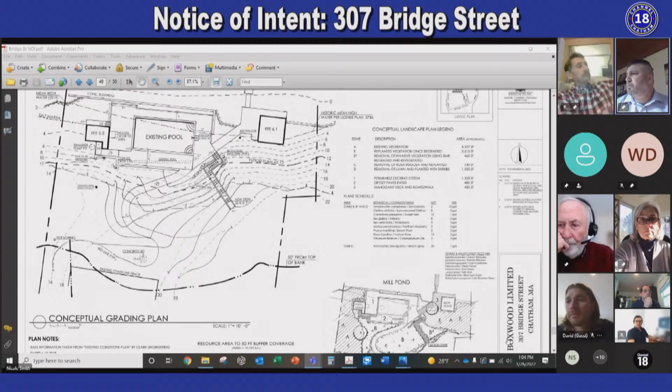I can do you want your plan first, or—I have a slideshow kind of to go through that will make it easy and concise, if that helps. Easy and concise is what we're all about here. Great. All right, let me share my screen.

You just make sure you're seeing the screen. Yep, it's there. All right.

As the application stated, we are proposing repairs and accessibility improvements to the existing boathouse, pier, and pool area at 307 Bridge Street. Blue Claw Associates and Coastal Engineering have prepared these plans.

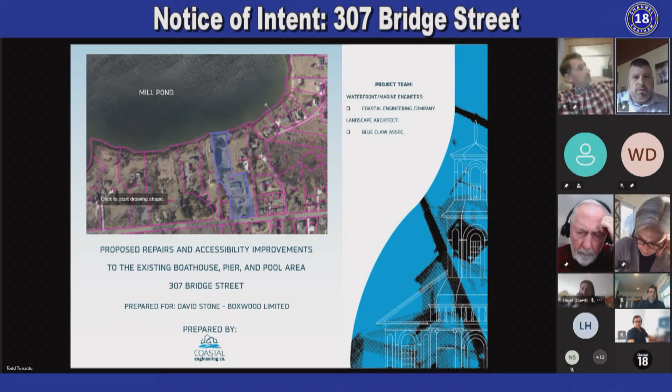Just to give a little history, it is a unique site in that it has an existing pool directly on the coastal bank and up against the bulkhead. The existing boathouse, bulkhead, deck, and timber pier and pool house structure were licensed in 1955, according to the Mass DEP Chapter 91 license.

The pool is believed to have been installed sometime in the 50s. However, the earliest plan recorded showing the pool that we could find was in 1976, recorded with the Town of Chatham planning. Additionally, the existing bulkhead just seaward of the pool was reportedly repaired in the 90s with an order of conditions issued in 1994.

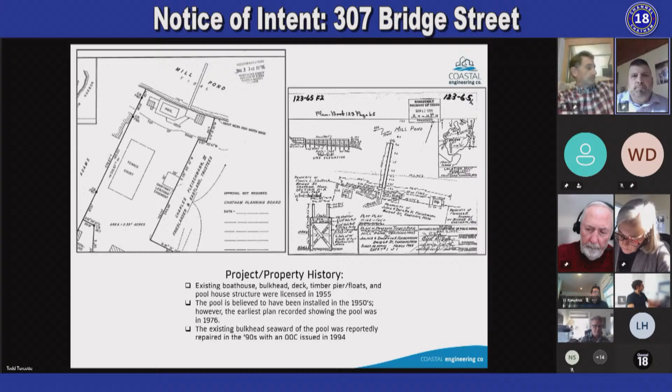The project includes repairs to the existing boathouse and deck foundation, some minor repairs to the boathouse, replacement of the existing timber bulkhead directly behind the boathouse, improved accessibility to the boathouse, pier, and pool with a handicap accessible path and reconstructed stairs, and repair to the existing pool deck area with improved handicap accessibility around the pool.

Also invasive species mitigation in the landscape area - I'll let JT speak to that later on - and reconstruction of the existing landscape retaining wall for accessibility improvements. One other item is removing and replacing in kind the existing pump to the septic system from the pool house.

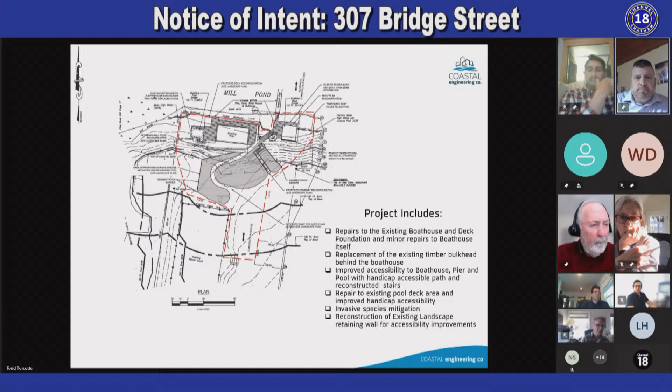The boathouse foundation and deck foundation currently consist of 30 existing piles. We are proposing to replace those with 21 new piles, reducing the impact, as presented in the alternatives in the narrative. The boathouse will basically be lifted off and temporarily supported on a pile structure, then put back and installed on the new pile foundation.

Next, the existing deck around the pool will be reconstructed to keep it all at one level and provide easier access into the pool and around the pool for handicap accessibility.

Then we are replacing and improving the stairs. The access stairs currently do not have a rise and run that meets code requirements and are a little awkward, so we're improving those.

The existing path is not handicap accessible - it's 55 feet long with a rather steep slope. Our proposed path is about 90 feet long, at about a 13% slope. As part of our alternatives analysis, we looked at the fact that if we were to completely comply with ADA compliance, we would need in excess of 165 feet of path. So we reduced that, using assistance for handicap accessibility, coming up with a reasonable length of 90 feet.

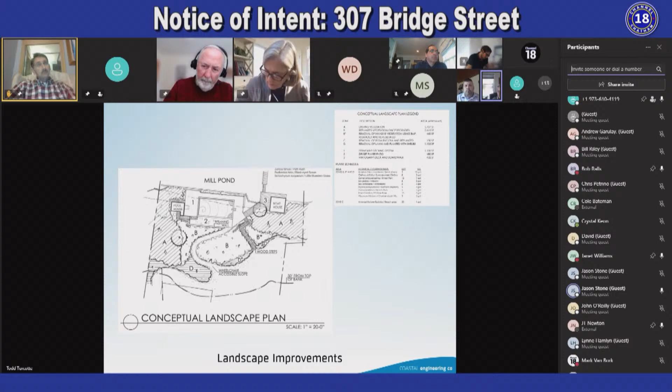That septic system that is there is a cesspool on the property at the top of the bank. There are three cesspools on the property, four actually. The one that serves the waterfront is up at the top of the hill, and you can actually see where it is on the map there where it says concrete lid. That tank is about 6 feet in diameter and 20 feet deep, and the cesspools have holes in the sides of the tank for the liquid to go out into the ground.

The tank is where the sewage effluent is pumped from the holding tank down at the boathouse up into that tank. We've looked in there a few times over the years and have never seen any liquid at all in the bottom of it, the cesspool we're talking about. So we're not planning on making any changes to the tank, the cesspool where the effluent goes to. We're planning on replacing the steel holding tank, which is where the toilet flushes into behind the boathouse there, and a pump house, that is, the pool pump house, and replacing the pump that pumps the effluent up to the cesspool.

Okay, this is a question for the engineer. It's not required that the cesspool be changed to a Title V at this point, correct? Correct, Art. We have not inspected that, and as part of this process, it was simply replacing the pump and the holding tank from the pool house. Basically, it's a plumbing structure that was moving the effluent from the pool house up to the septic system. It's not the full component. It was not part of the scope of this.

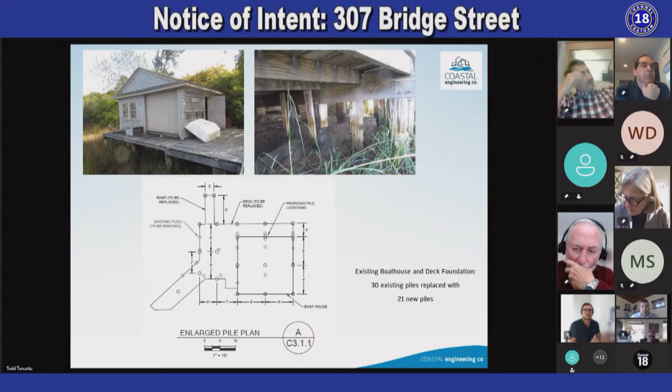Okay. The pool house has that bath, it's currently without a door. Are you planning on putting a door on it, or how is that going to work?

JT, you have anything on that? No, I do not. The actual redesign of any sort of interior work of the pool house, I have not discussed with the homeowner at this time. Certainly, I would think that it would potentially make sense to have a door. Yeah, we are planning on replacing the doors on that building.

Yeah, okay, thank you. Let's see, what else? The juniper along that slope provides some nesting habitat for birds and so forth. You're planning on removing all of it just to change the grade along the slope? No, down the middle would be removed in order to regrade, but there's still a fair bit of juniper that is to the far side, essentially in front of the pool house up the slope.

There would still be a fair bit of juniper there, as well as along the staircase between the boathouse area that we're not impeding. Those areas marked A, we're not touching at all. It's just the area marked B where we have to deal with the grade aspect of it. So there would still be a fair bit of juniper located there.

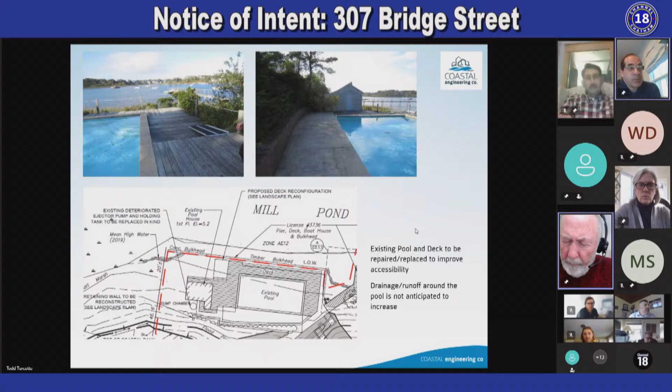I do have just some random questions here. Is there irrigation within the NDZ? In-ground irrigation, currently or proposed? There's currently no irrigation, but obviously the areas that we're going to be impacting, we would be putting in a temporary irrigation system in order to ensure that the plants survive and thrive. And then, like I said, it'd be temporary, that it would be removed once, just like it would in any sort of conservation area.

Yeah, a whole lot of your voice became robotic there for a while, but I think we're past that.

Actually, I'll ask Nikki the next question. Nikki, do you believe that Shellfish needs to weigh in on this at all? It's not a bad idea. I don't think they'll have much to say, but I will definitely send her the proposal and just give her the heads up and see if Renee has any comments on it. But I don't foresee her having anything since it's already in existence.

Yeah, just to cross the T. There's a pine being removed, as we discussed, because of construction. I noticed that you're putting in two trees among the mitigation, two service berries. Of course, I might argue that those are shrubs as much as they are trees, but nevertheless, are those in compensation for the removed tree, or is that a separate issue? We were thinking that it would be in compensation. Obviously, if there's a recommendation that the Conservation Commission would require a different type of plant, we would certainly entertain that. But the whole idea was to try to create a more diverse mix of plants than what's currently located. It is a scrub pine that we're taking out, but we can certainly be putting in an actual tree that makes sense in the area if that's something required by the Conservation Commission.

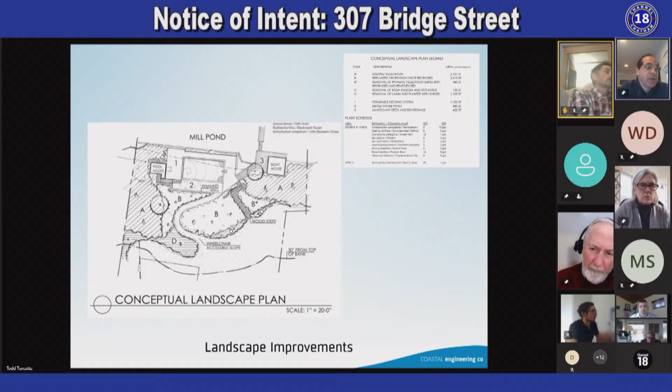I'll leave that to JT's landscape architect side of it. And will there be, I forget now, the grass that is in the NDZ, just characterize what it is and what it will be after the project is over. It'll be unchanged, I guess. Is it Cape Cod lawn essentially, or what we would call turf lawn? Yeah, it's a Cape Cod lawn that's currently out there, and that's what would still be maintained as such.

And it's not fertilized and no pesticides? We would have standard language like that in our orders of conditions to reinforce that. We don't use any fertilizer on our lawn currently. So I'm not, everyone on the commission feel free to correct me if I'm wrong, but I'm not hearing anything that necessarily would hold us up going forward.

I think we're talking about, from my perspective, asking for some demarcation, which is probably easily dealt with before we go to orders of conditions. Anything else? We have to get a determination on the septic. Oh, the septic, that's right. That is potentially a big deal.

Well, yes and no. I understand, and we'll definitely address that. However, this is part of one of the improvements. Replacing the pump in the tank at this point in the project really is not necessary, it was added to include everything so it could be done at this time. If we need to stage it, so we do this portion of the project in the boathouse and the landscaping, and then come back and deal with the septic as a separate issue, we can do that too.

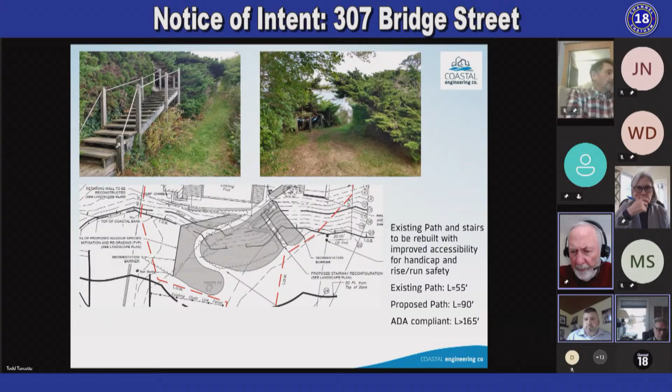So I guess we are in position, pending those items that we discussed, to continue this to the next work session, which is February 2nd. If you would be so kind, Bob. I'd like to make a motion that we continue 307 Bridge Street to the next work session on February 2nd, 2022 for an order of conditions.

I'll second. A roll call vote: Bob, aye. Janet, aye. Karen, aye. And I vote aye. Mary is here now. Mary, how do you vote?

Sorry, I was late to log on. We are still here in Colorado, but I didn't actually go skiing today. I was gonna say, you skied into the meeting. Good for you. So, but I vote aye. Okay, and I vote aye as well. So that's unanimous to continue. Thank you all, thank you very much. See you next time, thank you.

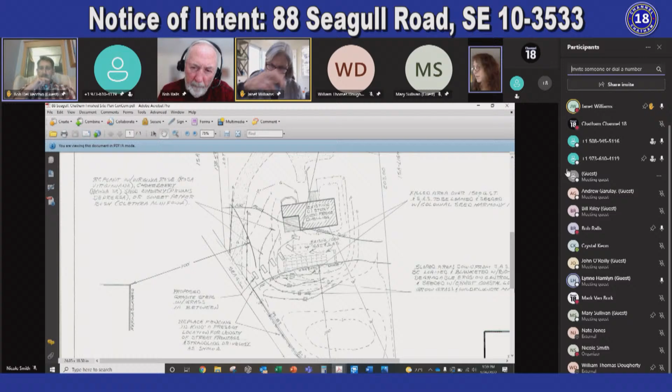Okay, and the riprap by the road, is that trap rock? Is that what you're going to do there? Yes, it's 6-inch stone, 6-inch bluestone aggregate.

Is that going to be enough to stem the erosion in that low point? It breaks up the velocity of the water, so it acts as a stabilizer against the road. The sharp edges and texture break up the velocity from the water, so it's not chewing out the sand that's there and eroding the road.

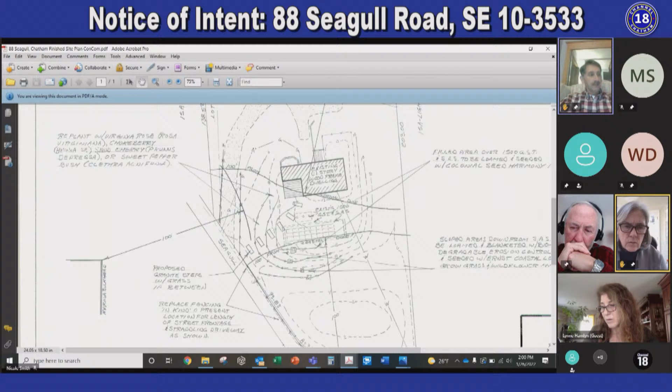And is it possible that's probably salt water running off there when it floods, correct? Sometimes heavy rain events. I tried to take a picture, had to go back, and it was flooded from those extreme high tides a couple weeks ago, and that was definitely salt. So it's both, but a lot of salt inundation, yes.

Could you plant beach grass around there too to help stabilize that area? Well, beach grass is really a bad plant to use unless there's sand inundation, because beach grass needs to be inundated with sand or it will eventually choke itself out.

So I don't recommend using beach grass unless you're on a dune. Because of the velocity and the water that sits there for prolonged periods of time, I think all you can do to hold back this road is a little tiny apron, it's 75 square feet.

And interestingly enough, and probably to the Hamlyns' detriment, this vegetation community in the depression is changing, probably to be more wet tolerant. So I think the idea would be to let it be what it's going to be or seeks to be, but stabilize the sediments, because they're all just sand sediments out there, very loose. Just stabilize the sediments where the velocity is, and then let the plants determine where they want to be in the bigger area.

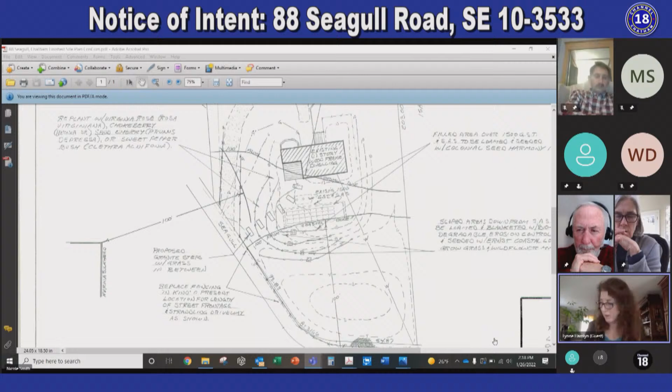And then I assume this is a private road. I think so. I looked that up at one point. I think it is, I would assume so. Otherwise I'm sure the town would have heard about the drainage issues by now. I think I was trying to make that somebody else's responsibility, and I don't think I was successful. This was brought to my attention by another neighbor that the whole area is being flooded, and whether it may or may not be caused by Outermost Harbor or just general sea level coastal changes.

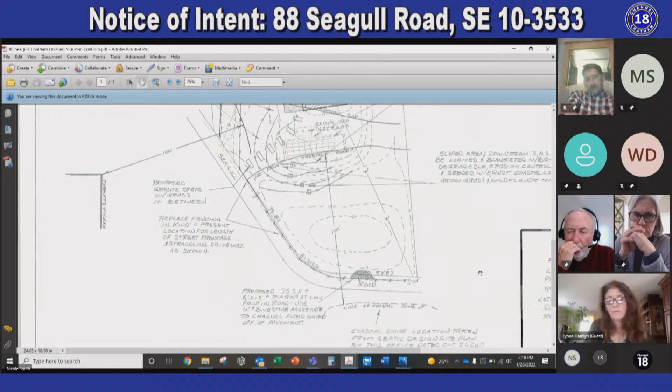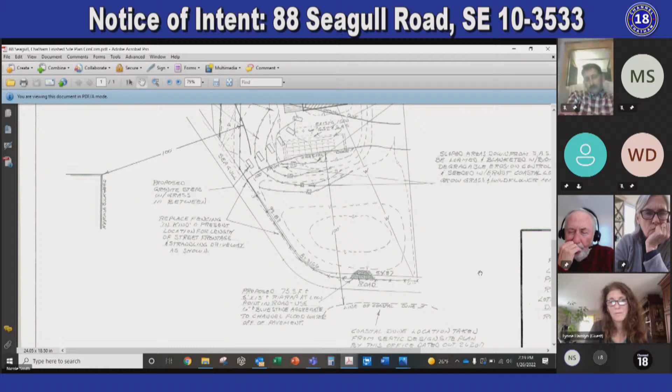So I am going to look into that with Ted Keon and the DPW, if there's anything we can do, and with Outermost, to see if there's anything we can do for flooding for all of the neighbors. But otherwise I don't have any issues with the project. Just once the work is done and plants are officially chosen and the numbers, just get that to me. Okay, and so we could put that as an OC, I guess.

Also, I noticed on the NOI, I don't know if it was on your end or ours, but the pages are out of order. There's 2 page 5s and it's all sort of mixed up. I don't know if that happened with the paper copies or whether it was part of the digitization, but it'd be good to have the digital copy cleaner. Well, both copies should be clean, but they're sort of mixed up. So what I have here is to get the pages straightened out.

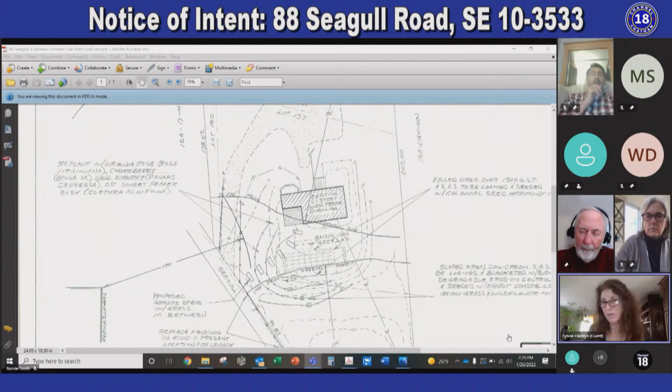Janet was interested in knowing how much fill you're going to be bringing in, and we will get a plant list whenever you're done with it. That's after the construction, right? Because I won't even know. Yeah, after the project is completed. And you want the 50-foot line on a revised plan also? Yeah, that's that.

So none of those appear to be showstoppers, and so if that's the case, I think we could schedule this, Bob, for the work session as well.

I'd like to make a motion that we continue 88 Seagull Road to the work session on February 2nd, 2022, for an order of conditions.

I think I heard a second there from somewhere on the road. Yes. Roll call vote: Bob, aye. Janet, aye. Karen, aye. Mary, aye. And I vote aye as well, so that's unanimous to continue to the work session.

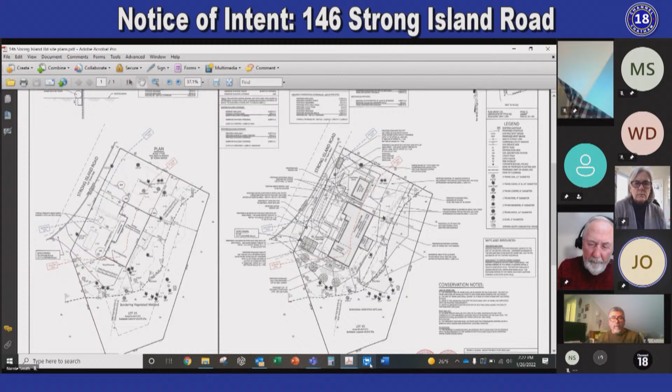impervious pool deck area within the floodplain, and what we've done is we have converted that patio area to a dry laid, so it has some permeability to it. The other bit of information we revised, and I would just like to go over because we didn't get a chance last time, is the mitigation we're providing, or the square footage areas that we're providing.

I gave you an updated chart, page 7 of 8. We are proposing a net reduction in the 50-foot no-disturb zone of about 1,200 square feet of hardscape and house. And we're adding within that same 50-foot buffer, and actually within the resource itself, just over 4,000 square feet of

restoration and mitigation plantings. And then within the 50 to 100, that's where you do see the jump in hardscape and dwelling within the 50 to 100 foot. That addition is about 2,300 square feet, or just shy of 2,300 square feet. And our mitigation in that area is 645 square feet.

So we've really front-loaded the mitigation to the resource area itself and the 50-foot buffer zone. So with that, those were the two changes we've made. I believe Attorney Riley's on the call, as well as Andrew Garlier, and we'd all be happy to answer any questions. All right, thank you.

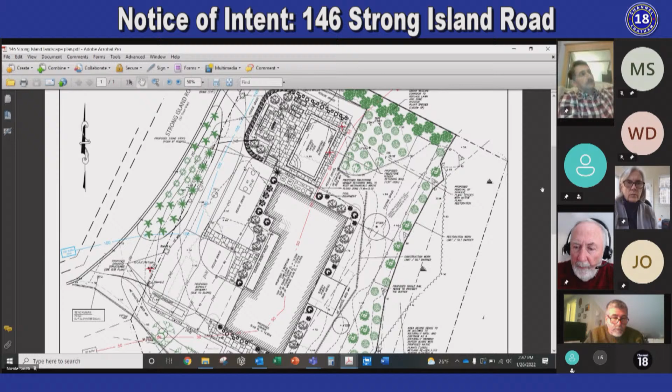Anyone else? I don't have anything else. I think the one change we were particularly interested in was the dry laid patio, and I can't think of anything else we were looking for from you. Someone can remember something else, but given that, Bob, I think we're ready for the order of conditions.

Okay, I'd like to make a motion that we continue 146 Strong Island Road to the work session on February 2nd, 2022 for an order. Wait a minute, Janet's got her hand up.

Before we vote on this, I just wanted to double check where they are with zoning, because we can't issue an order of conditions until they've... Of course you can, for crying out loud. From what I've heard, we have not filed yet. Not until we know what's going to be happening. Well...

We're filed with zoning. What I'd suggest is I'll send the date to Nikki a little later on or tomorrow morning. But we'd like you to take it up at your February 2nd meeting, even if you don't actually issue it at that time, so there won't be another month delay before we get it, right? Because we are filed, I just don't have our hearing date in front of me right now.

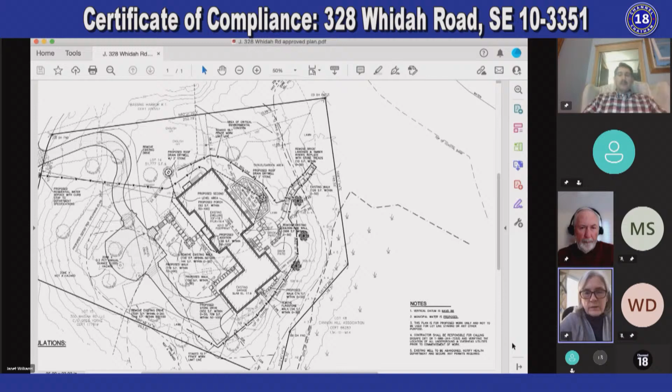I mean, even the COC pictures, it's pretty green. So yeah, this is one I wanted to look into a little more. It was one I thought was going to be simple - oh yep, the as-built matches what was approved - but then...

I saw those conditions and they were a little harder to measure. So I want to reach out to the COC applicant and perhaps do a site visit with them, or request some sort of mowing protocol or something like that.

Right, okay, so we're not voting on this one at this moment then. Yeah, we don't really have to vote on anything, we can just continue it to the work session. Oh okay, we'll hold that one.

All right, so that one will be moved to February 2nd. I mean, it might be cleaner to go ahead and vote to continue it to the 2nd. Okay, I'd like to make a motion that we continue 328 Whidah Road to the work session on February 2nd, 2022 for a further review of the certificate of compliance.